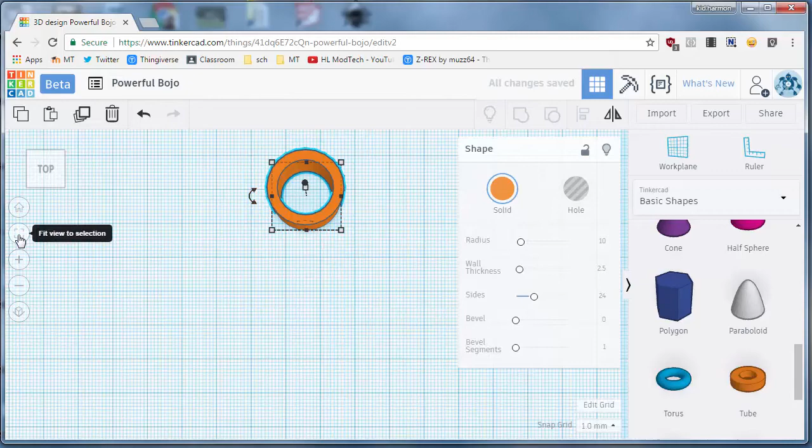Hey there, fellow tinkerers. Let's make a new custom spinner using that awesome tube again. Showing off this new one, I want you to fit view to selection when you drag it out there.

Let's make our radius 13.5. That gives us a diameter of 27. Make sure after you type it, you press enter.

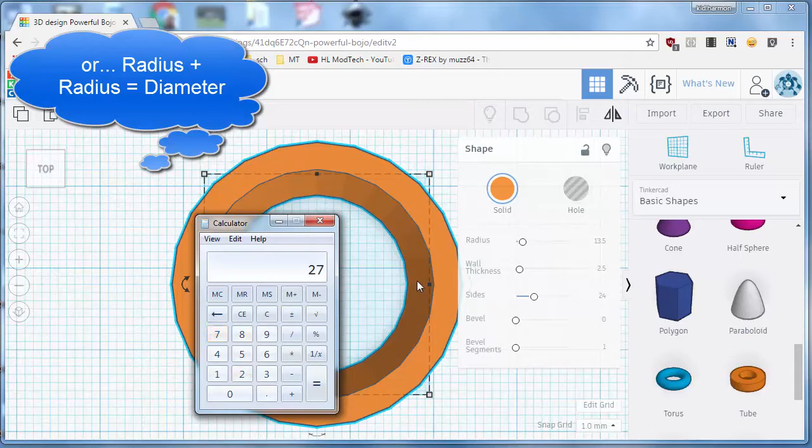Check out this math. If you've got a 27 diameter cylinder, and you take away the perfect bearing size, which I found to be 22.3, you get 4.7. If you divide that by 2, because there are 2 thicknesses of walls here, you get 2.35. So change this to 2.35, and now you've got the perfect size hole for a bearing.

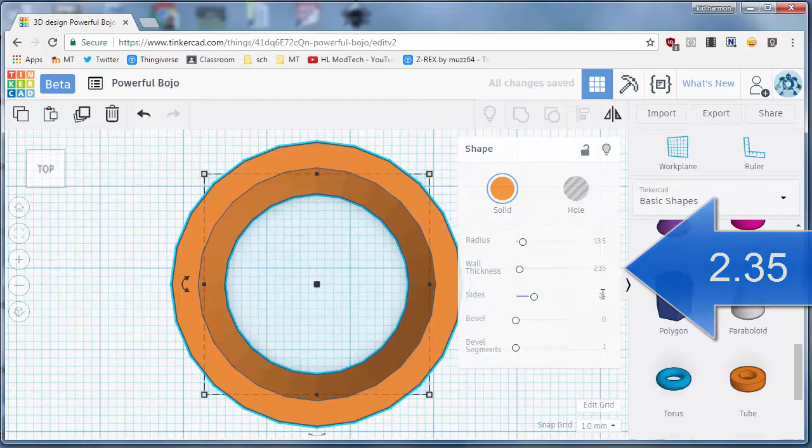I like to make that 60. The bevel is where it gets really cool.

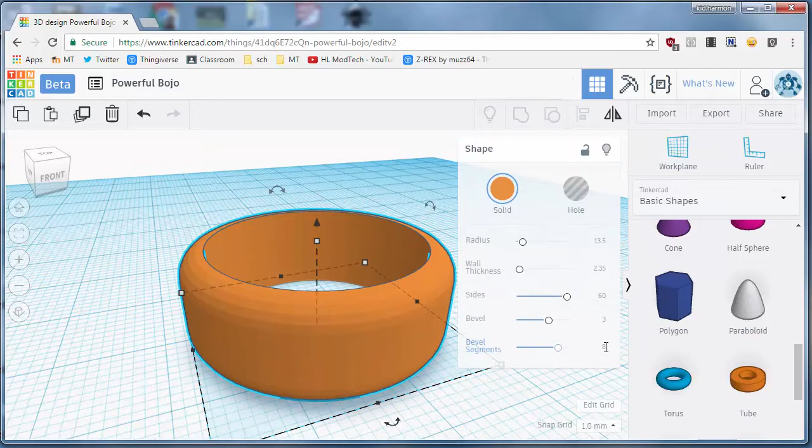You could leave it straight, or you could do crazy things, and this is where you can customize yours over mine. I'm going to do a bevel of 3, and a bevel segments of 5, so I get a nice rounded shape. I'm going to see what it looks like if I do 8. So that's even more smooth, and I'm going to try a bevel of 5. This is where you can experiment and see how you can make yours even more cool than mine.

The last piece, and this is most important, is you've got to change that to 7. Don't forget to press enter as you build these, because if you don't press enter, it doesn't really happen. So right there, you've got a perfect size

hole for your spinner. And now I'm going to line mine up with a center dot on my grid by just switching it to 0.1 and dragging it where I want. I just like it that way so it looks more oriented the way I need.

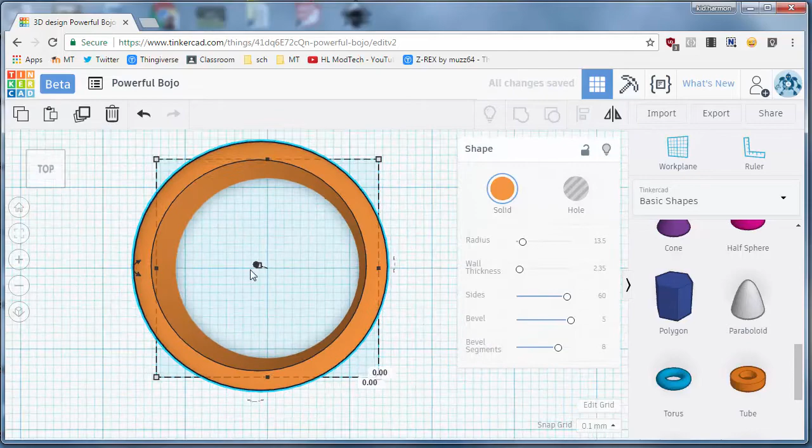For this spinner, I want to make a quad spinner. So I'm going to click on my first piece and do Control D. I'm going to switch to moving 5 millimeters at a time, because that's pretty nice for just nudging it out. I'm going to do Control D on that and move it back to the other side. Notice there are nice connections between these.

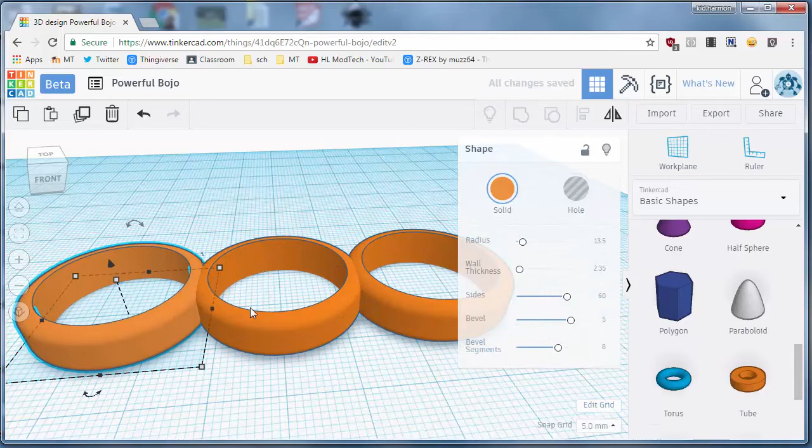And then watch this trick. I'm going to hold down Shift. I'm clicking the first one. I'm holding Shift and clicking the second one. I'm doing Control D, and then I'm rotating that 90 degrees. And boom, I have got a wicked cool quad spinner in no time at all.

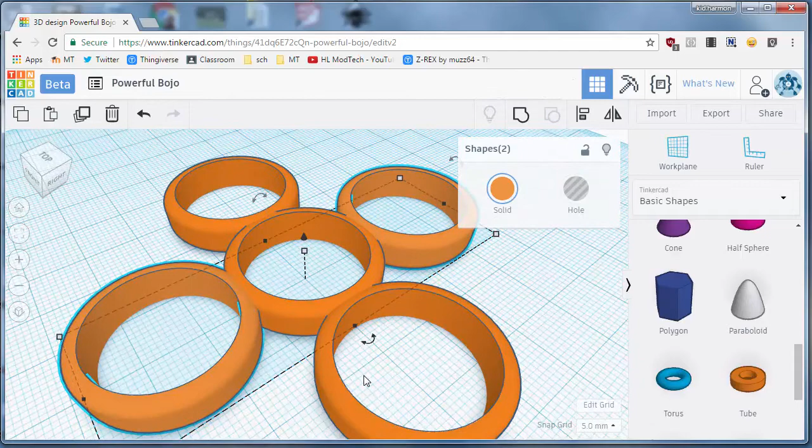But I'm going to add one last amazing touch to make this mine and totally mine. I'm going to go back to the Tinkercad shapes. I'm going to bring out a chunk of text, and change it to have my initials, MH. I'm going to pick Serif, because I like those little danglers.

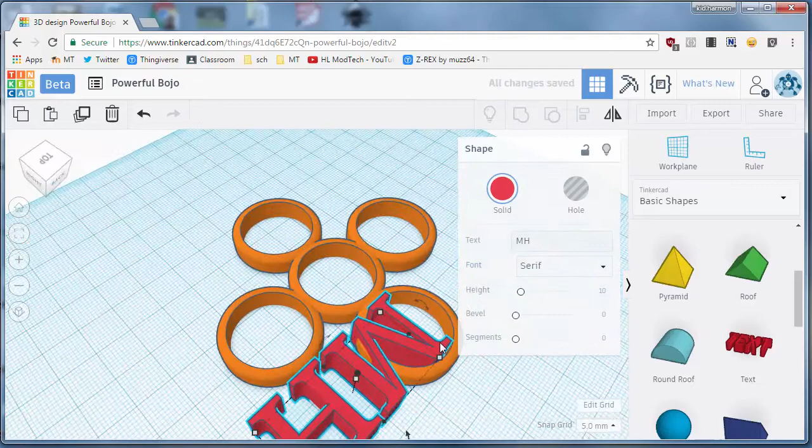And then I've got to stand it up on its end. So I'm just going to rotate it, using the little clicks to get it 90 degrees. I'm going to make it super small. Remember, our whole project is only 7 high, so I'm going to make this 5 millimeters high.

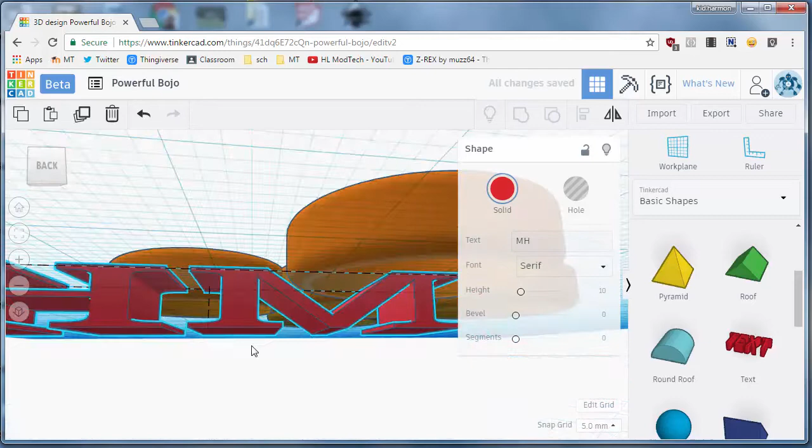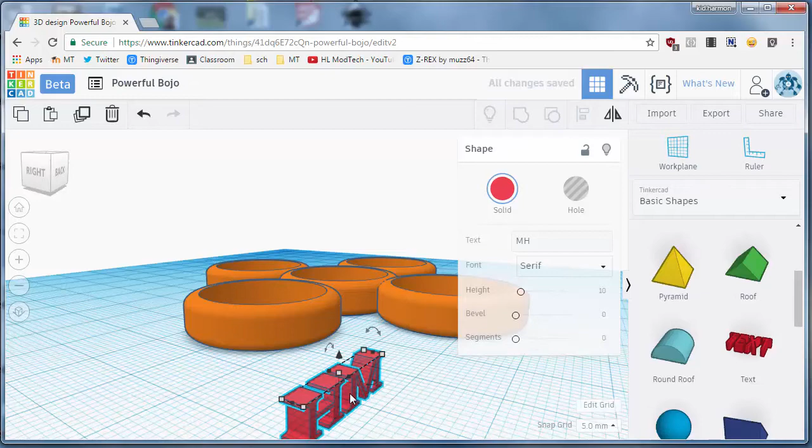I want it to sink in. Right now it's 5. I want it to sink in 3 millimeters, because I'm going to stick it in the side of one of my shapes. Right now it's going to fit on that side. So I'm going to just move it over here.

And now when I spin the world around to take a look at it, you can see my MH is going to look pretty nifty. I've just got to place it in my design. And maybe you're figuring out now, I'm going to use the arrow keys. Got to change this back to 1 millimeter so I can line it up the way I want.

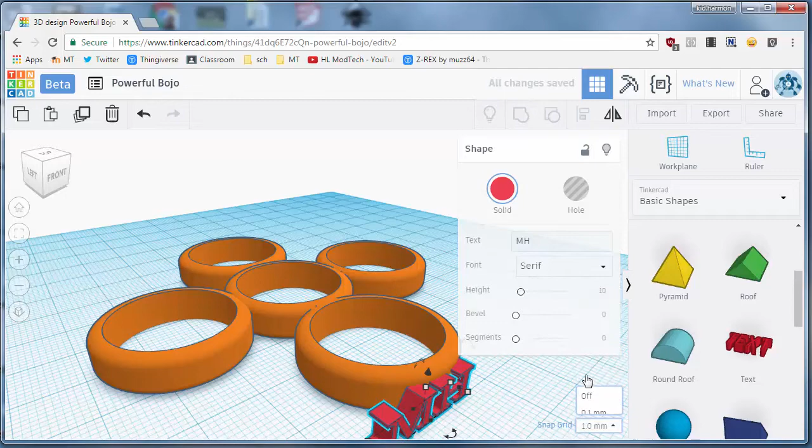I'm going to turn it into a hole, and I'm going to cut my initials out of my fidget spinner. I do need to make sure I keep my structure sound. So I'm going to raise it up 1 millimeter, and I don't want it poking out the back.

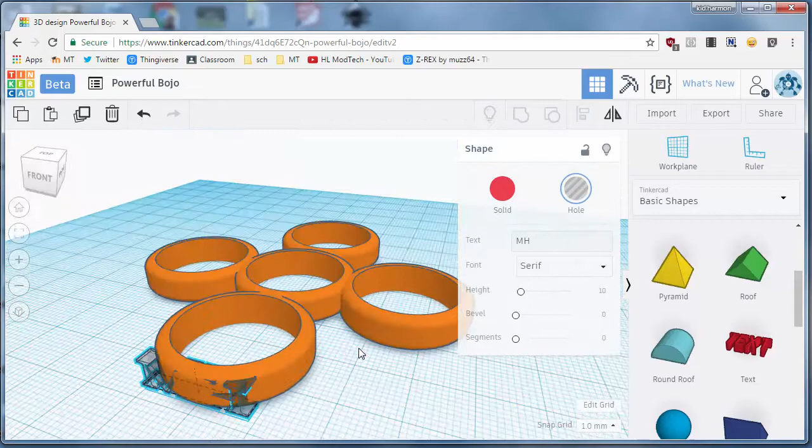Let's switch to the top view quick. You can see how that's cutting out totally, which would be not cool. So I'm going to do 2 things. I'm going to make it a little bit smaller, and then I'm going to nudge it this way with my arrow keys

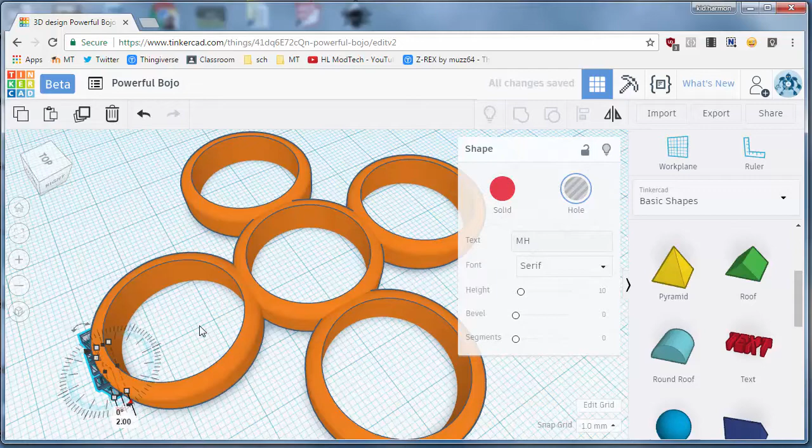so I can see that the MH is cut in, which that's going to be pretty sweet. And I want to make sure it's not poking out. So I'm going to grab it from this side. Boom. By making it a 2mm indent, I can now select the whole thing, and I can group it.

So my spinner is forever going to be my spinner. You could, of course, do that on every side. You just have to make sure you have it oriented, and you will have a custom, classy spinner.

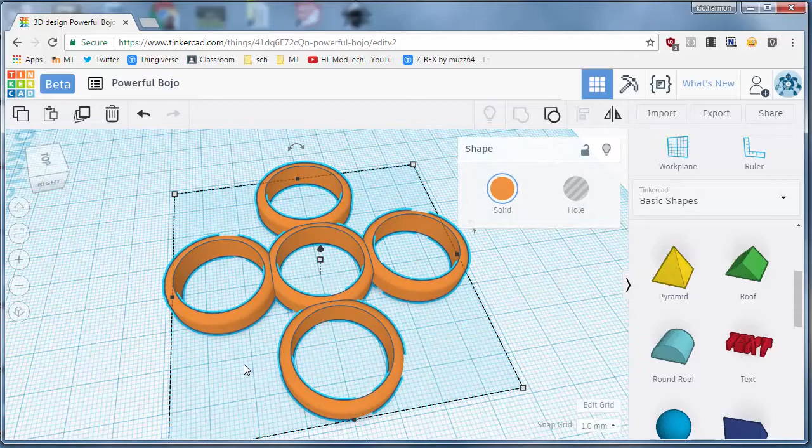Make sure you also name your file, because later they're nice to find, and I put my initials on it. Hope you have fun. See if you can come up with other cool ways to use it, and keep tinkering.